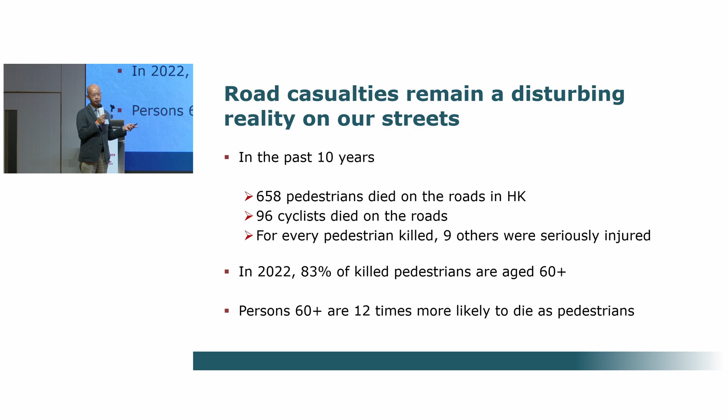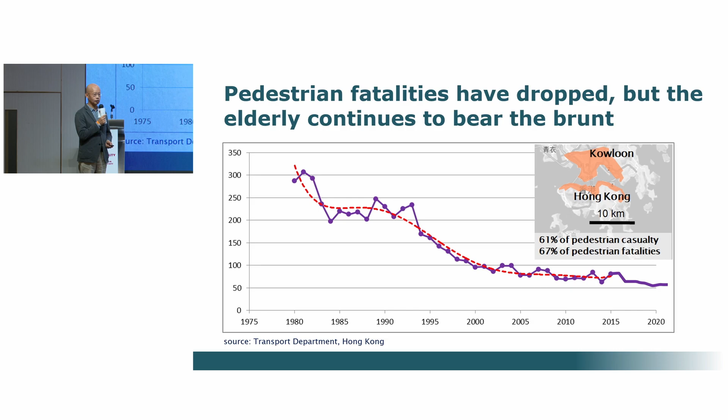It is true that the road casualty picture has been improving. In the early 80s, we had almost one pedestrian killed every day. Nowadays, the number of fatalities for pedestrians has dropped to about 54 per year. But that doesn't mean we should be satisfied with this figure. We always look for zero fatalities and serious injuries. I think this is the trend throughout the world, even though it is very difficult. But I think that should be our ultimate aim.

The modern approach to road safety is actually what we call the safe system approach. In Hong Kong, unfortunately, we have not really adopted this type of approach, which has been advocated by the United Nations and seriously conceived in many countries, including Sweden, Australia, Norway, and even the United Kingdom, where they look at their road system as a system. We are looking to safer roads, safer speeds, as well as safer vehicles and safer users, with the ultimate aim that we will not have a single fatality or serious injury.

The main difference between our current approach is that the transport system must accommodate foreseeable mistakes. I think we have not gone that far, particularly that in Hong Kong we tend to blame the victims, we tend to blame road users. Also, an important point for the safe system approach is that the tolerance of the human body, which we cannot easily change, is fundamental in the design of our roads, our streets, our vehicles.

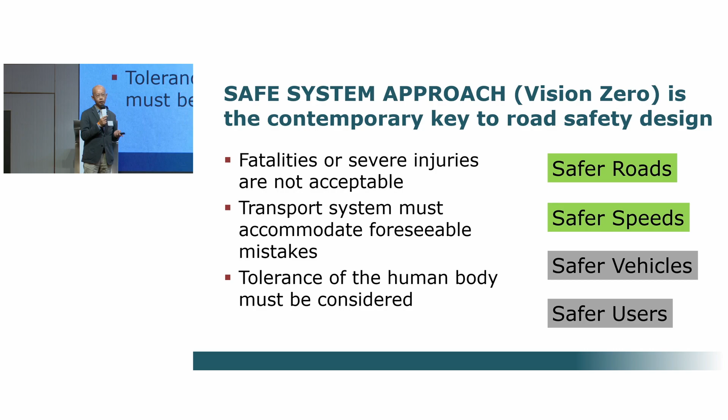Under the safe system approach, we look at road design and street designs from 3 perspectives to try to promote road safety. The first one is exposure. It is always necessary to reduce exposure, particularly where there are a large number of vehicles and at the same time a large number of pedestrians or cyclists.

Unfortunately, sometimes we go too far. In trying to reduce exposure, we introduce footbridges or subways where they should not be provided, to the extent that we are causing unbearable inconvenience to the users. And sometimes we think we put more barriers or railings to guide pedestrians. Sometimes they are not really the solution.

But there are two other possibilities. One we call the self-explaining road design. The other we call the forgiving design. To some extent, we have adopted this kind of thinking, but not too systematically up to now in our road design practices. Therefore, we have been trying to promote these two concepts, how to make our roads even more self-explaining.

That means the roads and streets should be intrinsically clear to the road users, particularly drivers, of what speeds or behavior they should adopt. But on the other hand, we know that collisions are often inevitable, no matter how well your road systems are. Therefore, the system must also be forgiving, meaning at least the road user should not die or be permanently seriously injured in a collision.

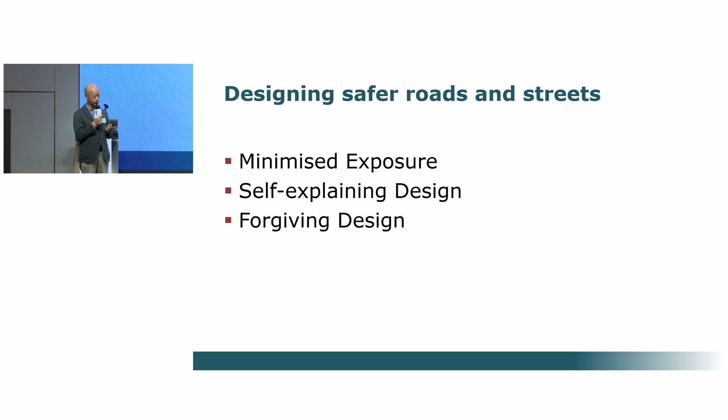An important concept is that any roads or streets should be shaped in a way that naturally the driver or user will know what behavior or what speed they should adopt. In Hong Kong, our design standards sometimes have been too much inclined in favor of the drivers, to the extent that drivers do not know clearly what speeds or what behavior they should really adopt.

In this respect, I would say that urban designers or landscape designers can have a lot to contribute in the future of how we can design roads which can accord with our preferred driving behavior, and to have a very strong character for different types of roads. So motorways, highways should have their own character, but urban streets, the character should be distinctly different.

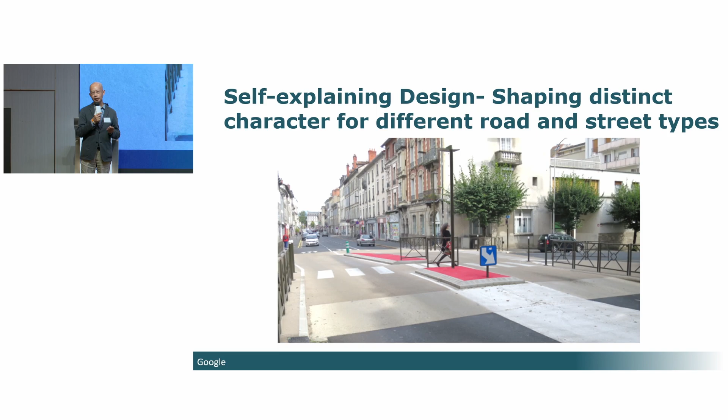I always think that landscaping is a good partner for road safety, but only if the principles are well understood. Landscaping can help road safety in a number of ways. One we call the promotion of awareness—awareness of intersections, pedestrians, etc. Then there's design of attractive facilities, like rest areas, and landscaping to calm down the users. And another is to provide or limit visibility.

Often we think that the more visibility we provide, the better. But that is not true. In road safety, sometimes we want to really limit the visibility so that drivers will not be distracted by the surroundings. And then there's forgiving roadside, which I'm also going to explain.

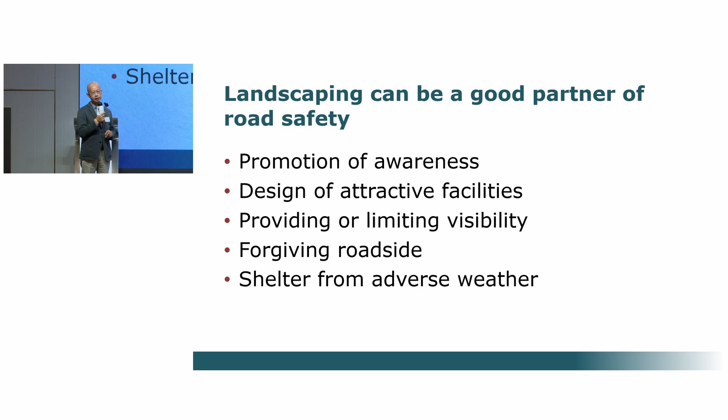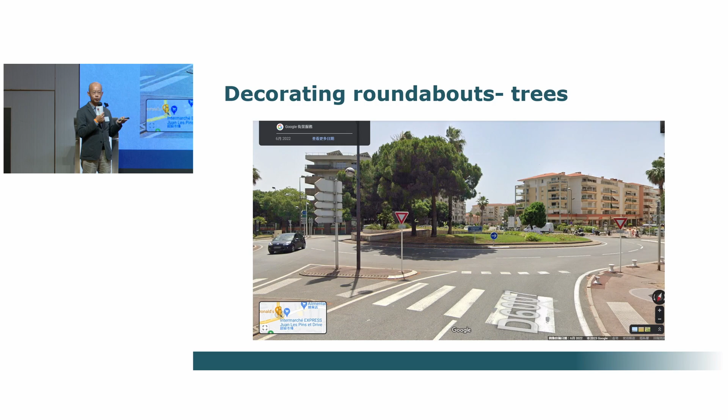But sometimes they would like to do more—more attractive landscaping with stones and big trees, whatever. I think that is fine, so long as the traffic speed has been reduced and we can guarantee that the traffic speed is relatively low, say less than 40 kilometers per hour. Then you can do anything, so long as the periphery remains clear for vehicles circulating around the roundabout to have certain visibility.

So in terms of road safety, really, we do not have any conflicts with good landscape or architectural design, provided that the principles are well understood.

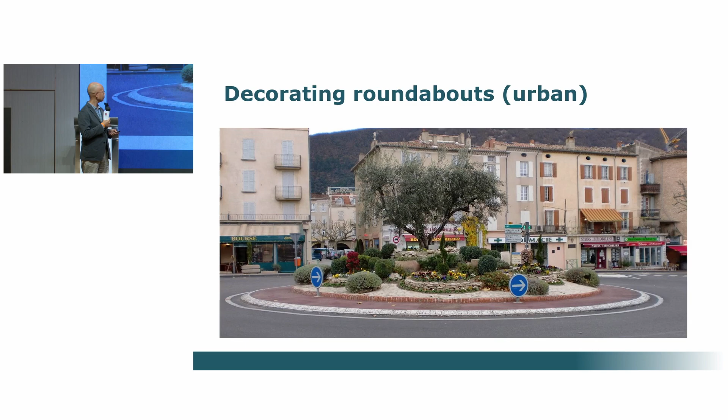And sometimes for major highways, landscape design should actually be integrated with the road design. We want drivers to occasionally see major landscape features so that they know where they are. Otherwise, they can easily get lost on a monotonous motorway.

Signs. In Hong Kong, we have a lot of signs—all kinds of traffic signs for loading and unloading, warning signs, a lot of markings on the streets, a lot of signs telling you what to do and what not to do. Well, that is not what the real road safety designers would like.

Actually, in road safety, we always look for limited signs. For warning signs, we put them only where they are necessary, and also where we know there will be a real effect on drivers' behavior. So for the very limited number of signs we would advocate, we also want them to be pretty—aesthetically pleasing in terms of the sign graphics and the mounting.

Especially since these signs are very prominent in the city center—if we have bad signs, as we always see in Hong Kong, in the city, then they can have a major effect on the aesthetics and on the urban design. And also outside the city, we can have very good signs.

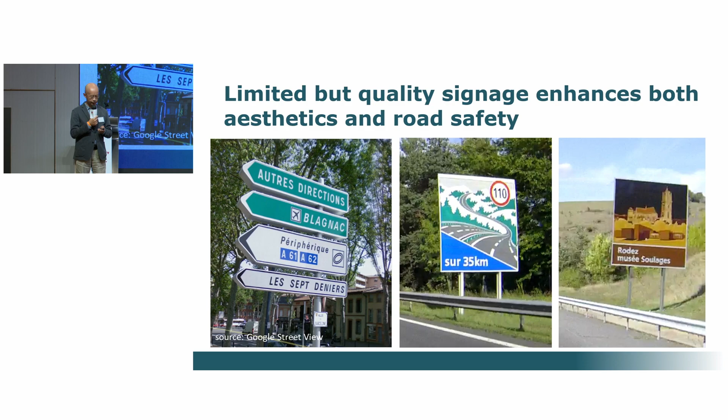Railings is one of the most discussed topics. From my point of view, I am neutral. I won't say that railings are completely useless or we should not put any railings. I think the fundamental point is that we put railings where they are really useful and necessary.

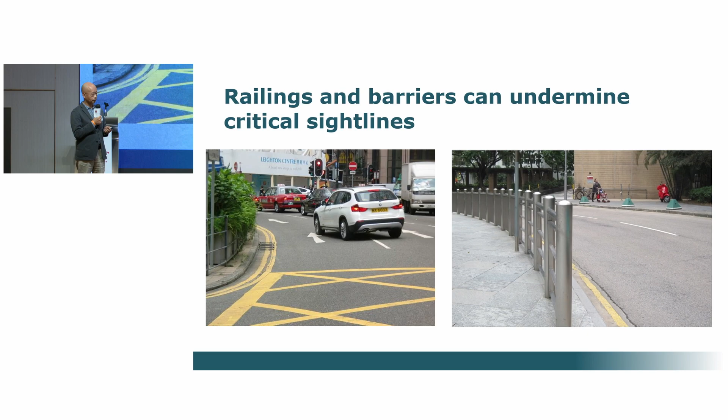On the other hand, I have also seen railings in architectural projects which are far too heavy. And often they reduce visibility to critical points, that means junctions and crossings, in a very unfavorable way.

Another problem, which has been identified recently in the United Kingdom, is that railings cause drivers to have tunnel vision. That means they become less aware of what is going on at the roadside. So they drive faster, and they do not expect that occasionally there is an opening. Through the opening, a cyclist or a pedestrian might just pop up, and as they have been driving too fast, they are unable to stop their vehicles.

So we always need to be aware of the two potential problems with railings and barriers, and also any planters which have a linear characteristic. One is tunnel vision, the other is visibility.

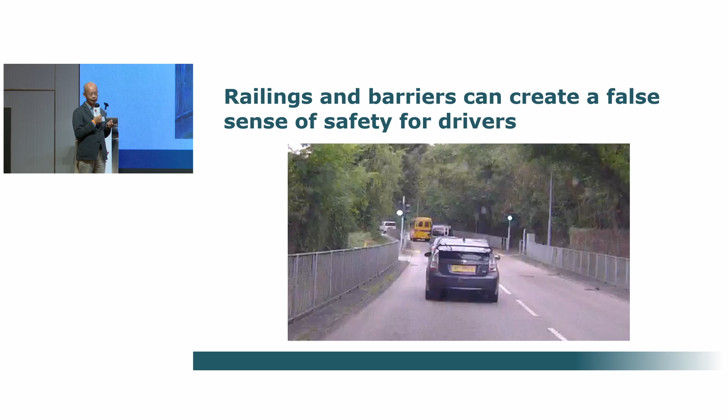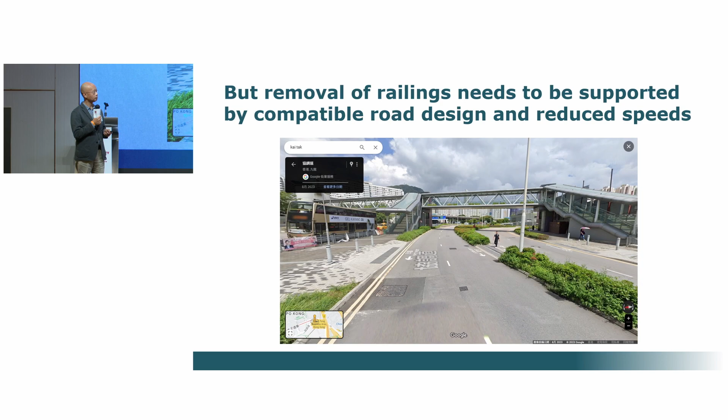One problem I have discovered in the many road safety audits I have conducted in the past few years is that developments, public transport, meaning MTR stations and bus stops, and crossings often are not coordinated. And the problem often is already embedded in outline development plans, sometimes even in outline zoning plans.

That means that pedestrians always want to take a straight line. If you have this situation, pedestrians coming off the MTR station or from the bus stop would take advantage of any gaps in the road. Okay, we don't want railings, but at the same time, we also have gaps, or they can cross through the roads without railings. So we are coming up with a very dangerous situation. So how to coordinate pedestrian crossings better with bus stops, developments, and MTR stations has always been a major focus in the road safety audits I have been conducting for urban streets and roads.

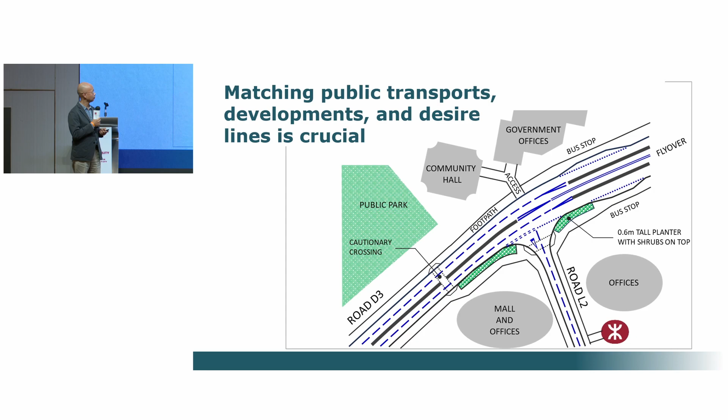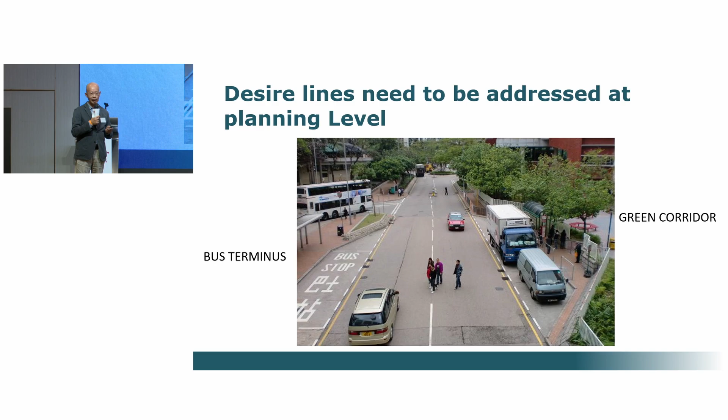And we found that there has been a cluster of pedestrian collisions. I mean, that is obvious. So the mismatch of pedestrian routes and crossings is a major problem we have to face in any developments in urban areas.

Another topic I would like to talk about is very important. It's about speed. In Hong Kong, traffic speed is not low. We have a blanket 50 kilometers per hour speed limit, but really whether 50 kilometers per hour is correct depends on context. On many occasions, drivers can speed up on urban roads, even on Nathan Road when the traffic is light, to 60 kilometers, or sometimes even 70 kilometers per hour or beyond.

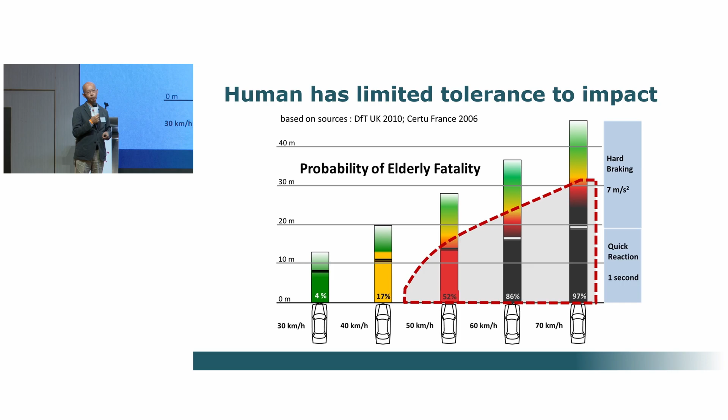But as you can see, our human body you cannot change. It is very easy for someone to get killed or permanently disabled at any speed beyond 40 kilometers per hour. But at the same time, we are facing a problem that traffic speed in reality is much higher. So that explains why we still have so many fatalities, even with many crossings installed and signalization, particularly for the elderly. Frailty is the problem. They cannot walk very fast.

So many of our main streets continue to constitute a problem. In one study I conducted on 4,000 pedestrian casualties in 1 year in Hong Kong, I found that the problem with pedestrian casualties is not only related to main roads and main streets. Actually, local streets are also important. They have more or less a 50% share.

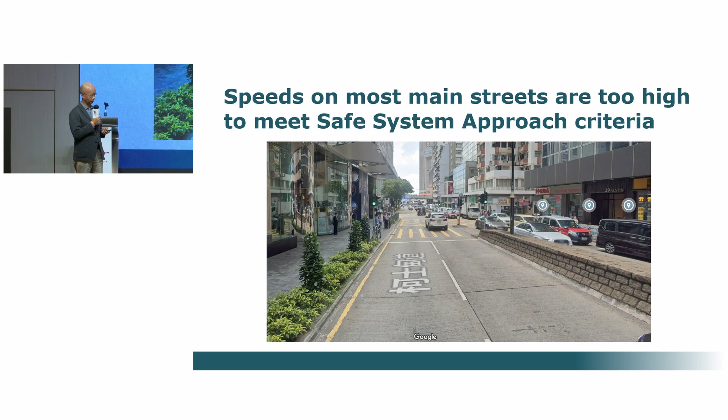For the more major roads where we still have a lot of pedestrians, the best balance could be somewhere in the order of 40 kilometers per hour. But where you have a lot of pedestrians and in residential areas, of course, we need to reduce the speed to 30 or even below.

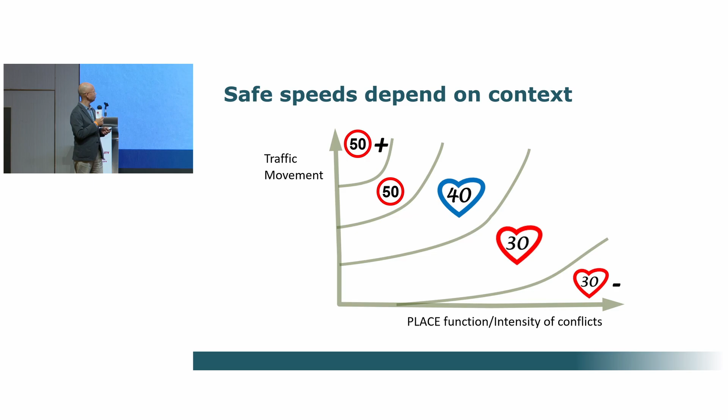So what is the relationship between lower speed limit and urban design or landscape design? 30 kilometers per hour is not just a number. We are not just putting a sign and that's all. The main implication is that lower speed limit means lower design speed in our design manual, and the implication is that there is less demand on geometry.

We do not need very smooth geometry and very large turning radius at junctions. Also, we have less risk of collisions, less risk of loss of control. Braking distance can be substantially reduced. And the implication is that for urban designers, landscape designers, architects, there will be much more liberty in the design of streetscape.

It is far more compatible with human scale layouts. There are far more possibilities for putting plants, and you don't need to put up safety barriers. There will be more space for amenities, and you can use far less signs and markings, and of course, railings as well.

So those are the main implications, why we have been advocating a lower speed limit, that is 30 kilometers per hour, since 2011. That is not only good for road safety, for reducing road casualties, but it will also be significant for designers to liberate all the possibilities to have good streetscape design, to have good, enjoyable, attractive, vibrant streets. And so I hope that you will appreciate that.

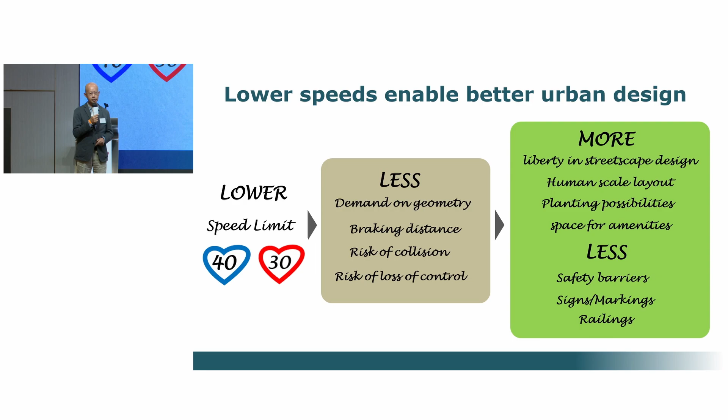And this morning, Transport Department said that they have been introducing 30 kilometers per hour speed limit on a number of streets. But from my perspective, I think that is not enough. What we are looking to is far more. We are looking to whole areas to have lower speed limit.

There's no doubt about some of the minor streets for 30 kilometers per hour, Lockhart Road, Jaffe Road, Johnston Road, and even Queens Road East. That should not be a problem for drivers because you will not be on those roads forever. Long distance drivers normally use the streets to access the major highways, where they can drive at a much higher speed.

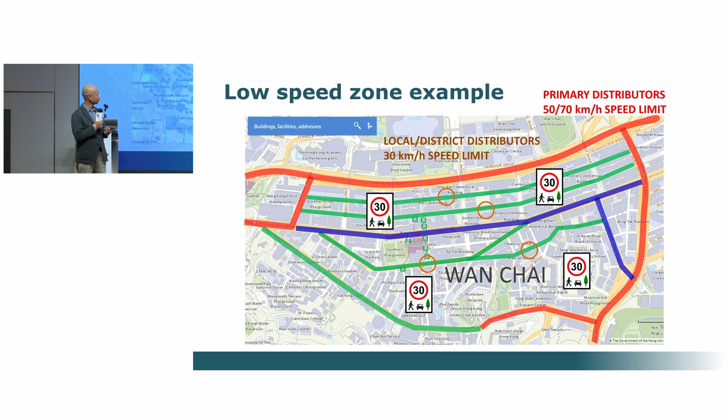Another example is at a more local scale, say at Stanley, we have been advocating another 30 kilometers per hour zone covering the road along the beach and also some of the residential streets, as well as the section of Stanley Village Road in the middle area where you have a lot of pedestrian activities.

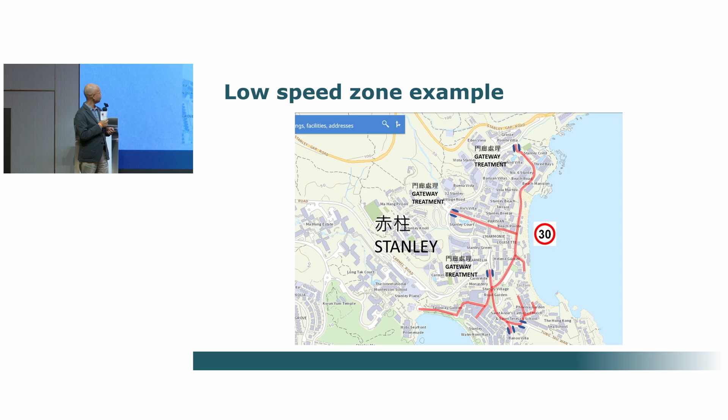There's another example which we have been advocating, for Sai Kung Town. Sai Kung is a very popular area for local tourists, for anyone going to enjoy seafood or going to the country parks or Geo Park. What we advocate is that not only the smaller streets in Sai Kung should be subject to a 30 kilometers per hour speed limit, but also a section of the main road. I think that is really important because the main road is part of the town center.

But of course, in Hong Kong at the moment, we have not reached the stage where there is good consensus, especially among the traffic community and also in government. But this is something we should go for. I always believe that someday we should achieve that.

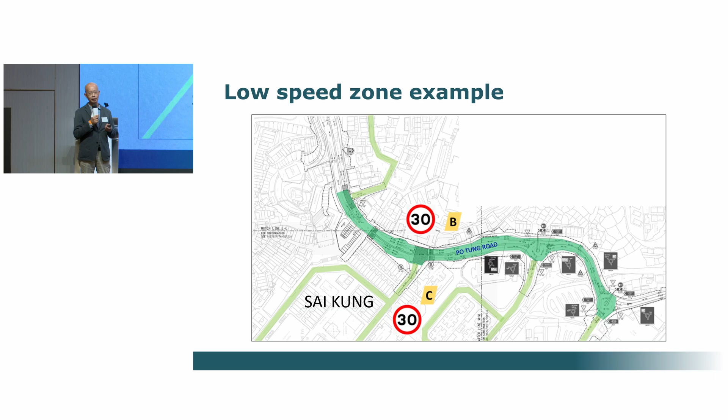As for new development areas, that is a different story, but again, the same principle can be applied. Right from the beginning in the outline zoning plan, there should already be the concept of low-speed zones introduced into the new road network. That is what I think should be done.

So I hope that my presentation has given you some inspiration, and I hope that in future, urban designers, landscape designers, and architects can work better with us as road safety engineers, and have more dialogue so that we can design roads together in a better way for the well-being of society.